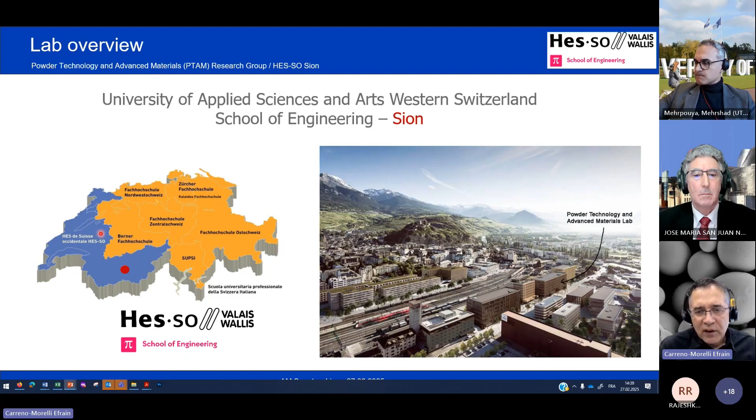I am quite focused for this organization on the sinter-based manufacturing techniques as binder jetting and others. My lab is located in Sion. Our strategy is related with providing solutions to industrial partners. This is why we are active in several materials, including the smart materials.

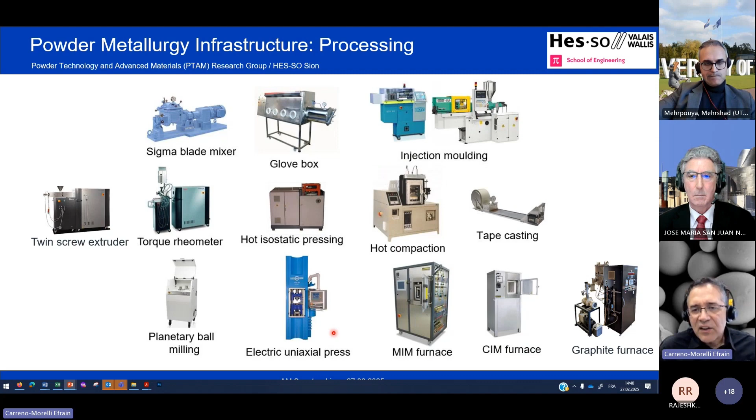We have state-of-the-art infrastructure for handling powders and mixing powders, to shape powders also by injection molding, by tape casting, hot isostatic pressing, and we can sinter these powders in molybdenum furnaces, graphite furnaces, ceramic furnaces, etc. We also do the classical uniaxial compaction to make parts by press and then sintering. And we have state-of-the-art equipment to characterize powders and materials.

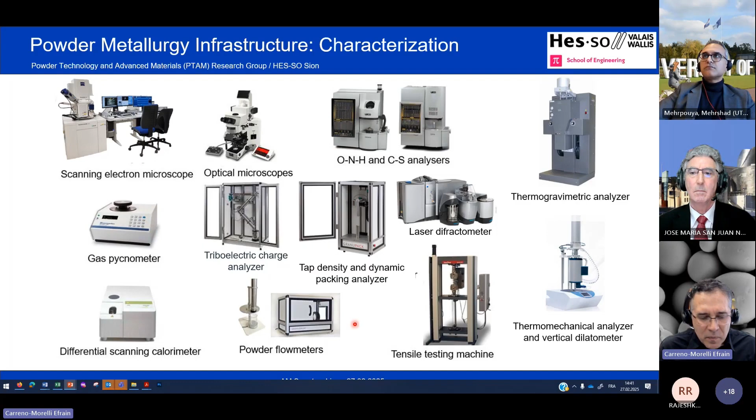Of course, microscopy, impurity analyzers, and we have all the necessary equipment to characterize powder particle size distribution and powder flow properties, especially useful for additive manufacturing techniques. We have dilatometers, calorimeters, all that.

In additive manufacturing, since 2017, we have the selective laser melting or laser powder bed fusion possibility. We have a desktop metal binder jetting 3D printer, which is a production machine with 1 liter of possible volume for build jobs. And we have our own technique.

We call it solvent jetting on granules, which we developed many years ago. I can provide a description of that. It can be useful to make shape memory and superelastic materials because it offers great flexibility on the base powders.

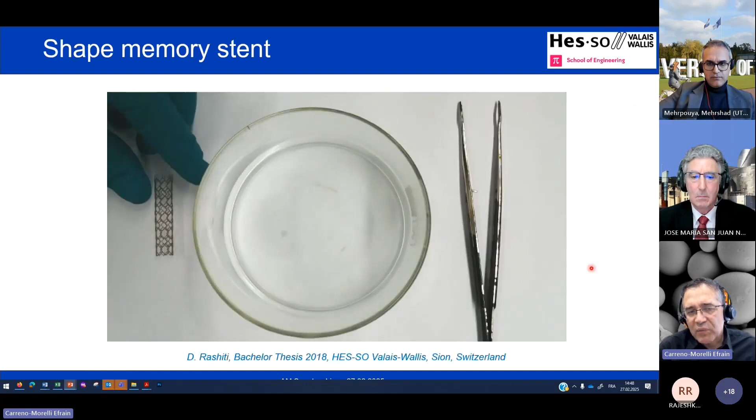Here are more details on the recovery of shapes of these stents.

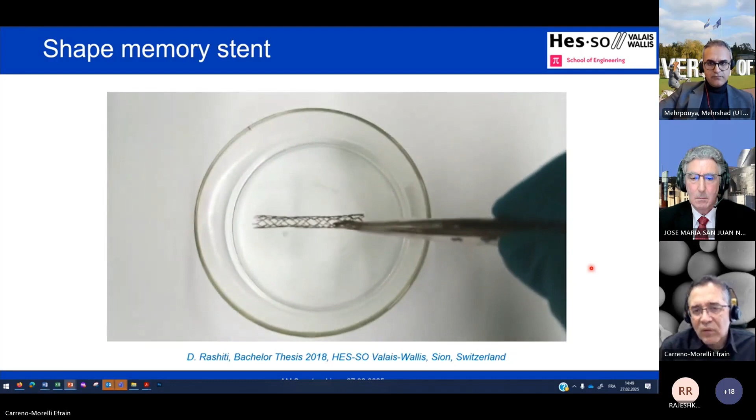More recently we had the chance to participate in a project of the European Space Agency with my colleagues Gabriel Pachotti and Samuel Remerme. We built simple shaped specimens, plates, and also some plates with a mesh, and we sent them to the labs for validation.

All the specimens need to be carefully controlled before being put in the sample holder before being allowed to fly. This project is called Euromaterial Aging, and the goal is to test the materials under the harsh conditions in space.

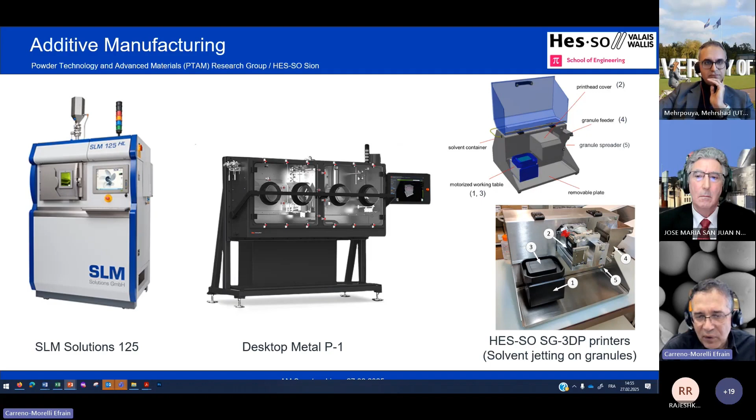When we use solvent on granules 3D printing, we perform it under air, without any inert system in the printer. We take care in powder handling and also in strict debinding and sintering conditions, but the printing itself was under air. This is probably not the best, but with our prototype we cannot do more than that. With devices like the Desktop Metal P1, one can work under a protective atmosphere, but we have not worked with that until now. And with laser powder bed fusion, we have just used argon of commercial purity. For the moment, these are our conditions.

There are two more questions. Someone asks, especially for the NiTi alloy, how is your curing and debinding stage handled because of contamination, and what is your binder, or what is your binder percentage exactly?

For the moment we do not disclose too much about the composition of our granules. Hope it will come soon. But let's say that the debinding and sintering conditions are similar to powder injection molding.

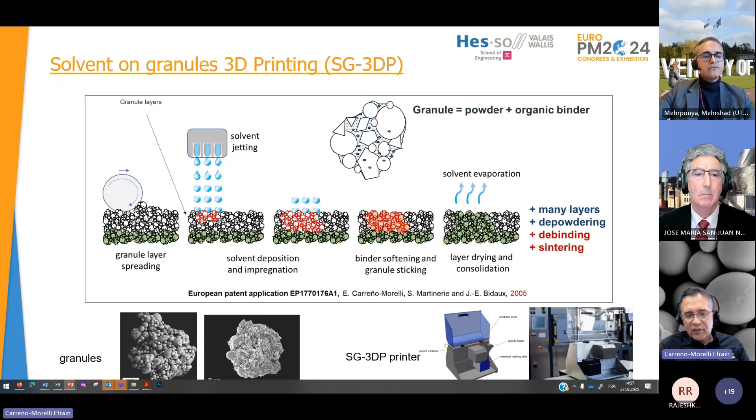If I understand properly, for the moment, in our knowledge and capabilities, we are far from the standards requested for medical applications. The standards are quite strict - many properties, including surface roughness, including fatigue, which is related to surface roughness. The potential advantage, of course, is freedom in shape and geometry, and also saving material. But the challenges are big in mechanical properties, fatigue properties, and surface condition. We can list some potential advantages, but this is just the very beginning of a nice adventure, we believe.

Maybe the last question, from Islam: thank you for the presentation. Utilizing both binder jetting and LPBF for production of NiTi, what would you say is the main challenge for binder jetting?

For binder jetting, it's very nice for mass production - much more convenient than laser powder bed fusion techniques, in our opinion. The challenge comes mainly from contamination, because of the binder or the printing conditions, and then the debinding and sintering conditions. These are the main challenges. But it's a technique which offers reduced roughness compared with laser-based techniques.

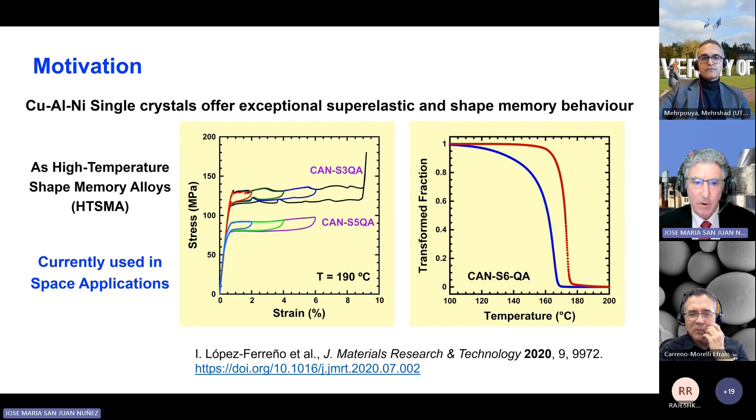So what is the motivation for doing additive manufacturing on copper-aluminum-nickel alloys? We have been working for several years on copper-aluminum-nickel single crystals because they offer exceptional superelastic and shape-memory behavior as high-temperature shape-memory alloys. For instance, I show here a couple of superelastic tests on two different alloys at 190 degrees centigrade, in copper-aluminum-nickel single crystals. This single crystal can be managed in order to have the transformation temperatures above, for instance, 160 degrees centigrade - meaning they work at high temperature, and we can control the transformation temperature between 100 and 200 degrees centigrade basically. At present, these single crystals are currently used in space applications, and in fact they are already flying in space.

At the beginning, we developed that in a European project. The single crystal produced in our laboratory are acting as a trigger in the space actuator for releasing the solar panels, or releasing the satellites, and so on. This is a technology that is tested, and at present we are doing the technological transfer to companies of space applications that produce space actuators.

But the point is that for many applications, single crystals are not very convenient because single crystal has a limited shape for applications. And then we was thinking on polycrystals. But what's the problem in copper, aluminum, nickel? Polycrystal tend to be brittle.

And this is a general property in all copper-aluminum based alloys, like copper-aluminum-manganese, copper-aluminum-beryllium, and so on, because it's coming from the high elastic anisotropy of these alloys. So because of this elastic anisotropy, for instance, the elastic modulus in the 1-1-1 direction is 10 times higher than the elastic modulus in 0-0-1.

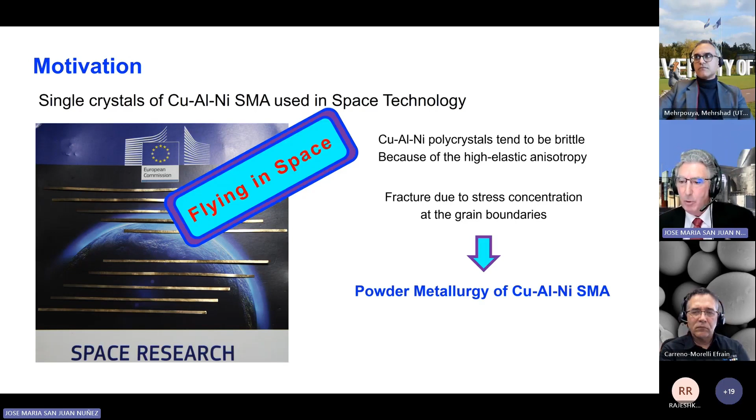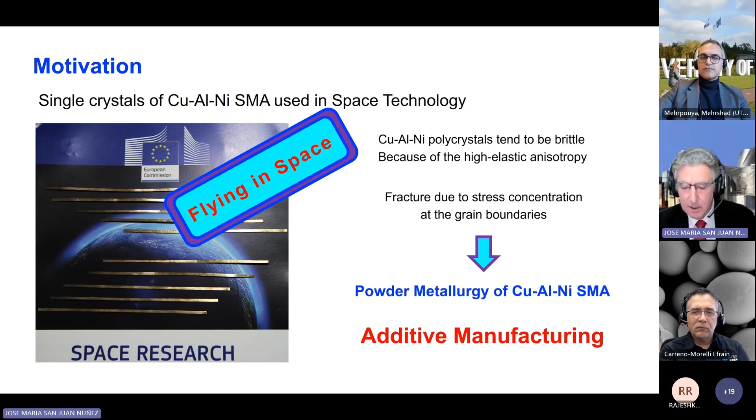So this is the idea why we use powder metallurgy of copper-aluminum-nickel shape memory alloys. And in particular now, with the development of additive manufacturing techniques, obviously we move to the production of these polycrystalline alloys by additive manufacturing. So this is the motivation.

Then, for the production by additive manufacturing, we work on different aspects. As it's a powder metallurgy technique, all the process begins by the atomization of the material. And then we explore 3 different lines.

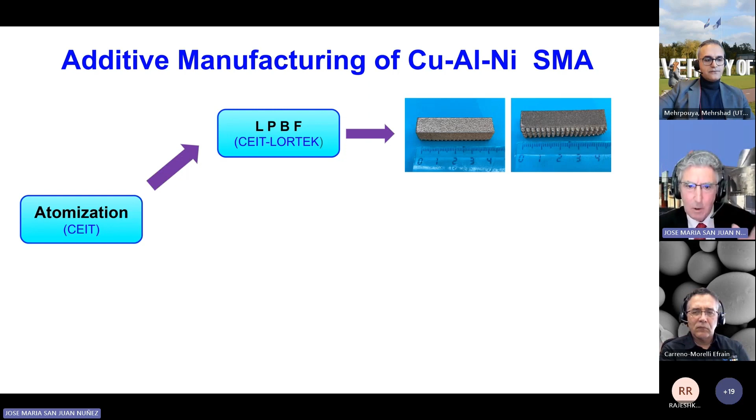The first line is to produce the massive material by laser powder bed fusion, in collaboration with our partners in the project. We also work on laser metal deposition with other partners, and also we produce the material by the classical metallurgy route, by hot isostatic pressing and hot rolling, in order to have a reference material, because this strongly textured rolled material is perhaps, up to now, the more performant material in this kind of polycrystalline alloys.

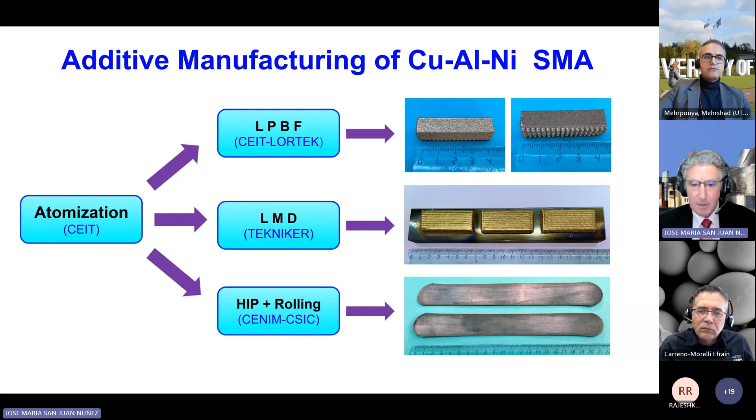So in the present talk, I will focus my attention on the first line, the production of this material by laser powder bed fusion, but I will take as reference for the performance the classical route, the HIP and rolling material, because this HIP and rolling material exhibits really very good properties.

And in order to compare it with the additive manufacturing produced components, we use exactly the same size of powder, between 15 and 45 micrometers, to produce this material, so that the starting point of the powders will be the same.

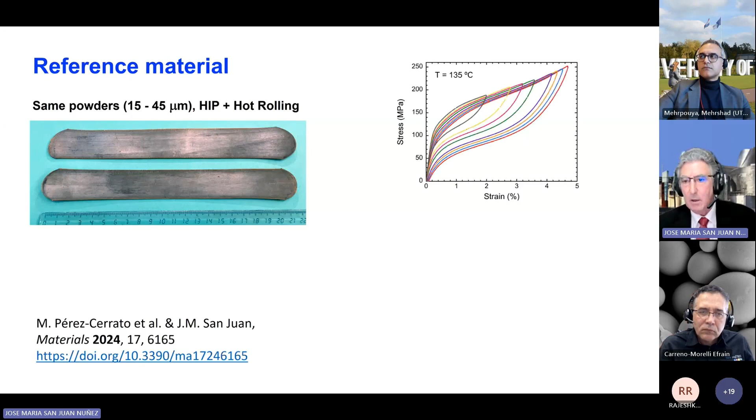So in this HIP and hot rolled material by the classical route, we obtain really very good performances: superelastic behavior with a complete recovery, and a reproducible shape memory effect that recovers perfectly up to 5%. So this will be our reference material to compare the progress on additive manufacturing when we obtain the material.

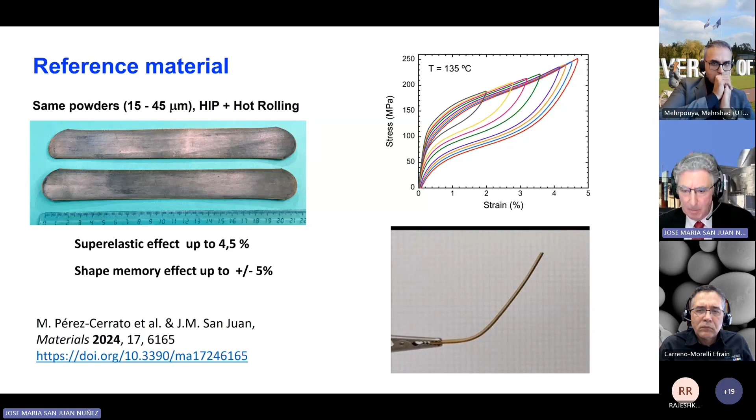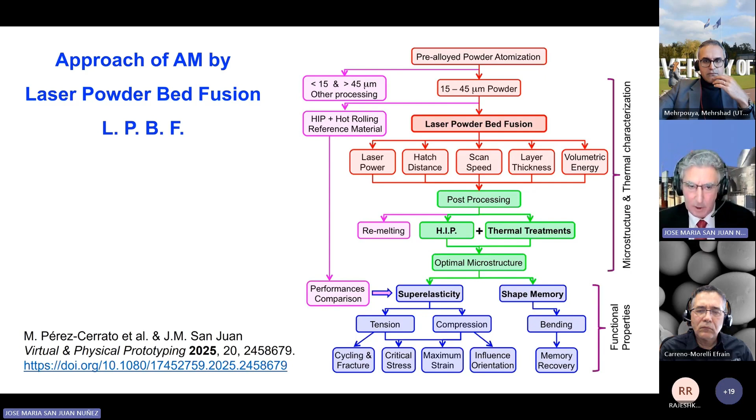And then after that, we use a couple of different steps for post-processing. Finally, when we get the optimal microstructure, we test the superelasticity and the shape memory in different conditions: tension, compression, bending. And eventually we compare with the performance I showed you in the classical powder metallurgy route, in order to verify the progress on the performances in additive manufacturing shape memory alloys.

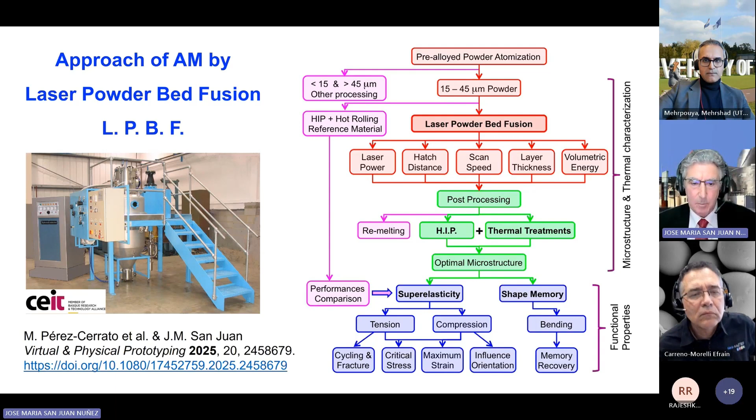So as I commented, it all starts with the powder atomization, done by our partners at CEIT, who have a small atomizer that produces 3 kilograms per atomization. And then these are the kind of powders we get. So this is the complete distribution, and after sieving from 15 to 45, this is the distribution we have locally.

You can see here a powder, as our transformation temperature is above room temperature, you can see the martensite in the powder particle. And as I commented, the atomizer produced 3 kilograms in each atomization. So in order to have enough material for the additive manufacturing process, we did 3 different atomizations, and our colleagues from CEIT master the atomizer very well, so all 3 atomizations really match perfectly the concentration that was established as target.

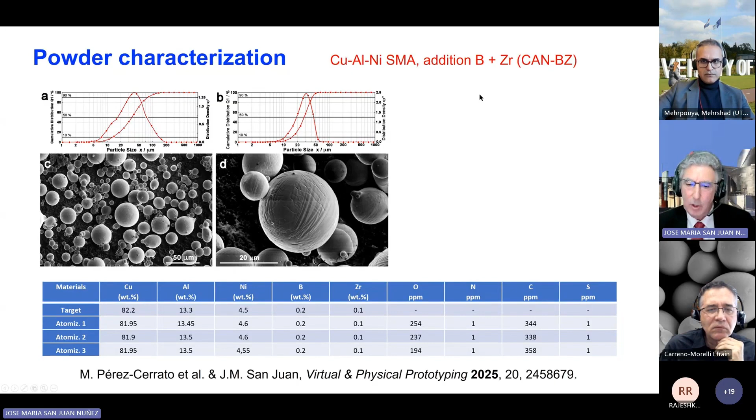And obviously we get some ppm of oxygen and some ppm of carbon, but in general, the reproducibility of the chemistry of each atomization is really very good. I have to comment here that in addition to copper, aluminum, nickel, as you can see in the components, we add some boron and zirconium as grain refiners, to avoid further important recrystallization in the material.

The reproducibility of the atomization can also be seen if we perform differential scanning calorimetry on the powders obtained in each atomization. You can see here the comparison between the thermograms of powders from atomization 1 and atomization 2, and the thermograms are absolutely superimposed, so the reproducibility from one atomization to the other is quite perfect.

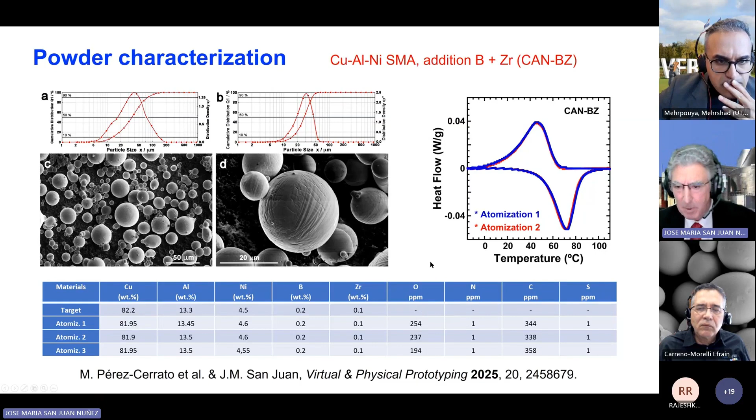These are the powders we will use to produce parts by additive manufacturing via laser powder bed fusion, using a Renishaw 400 machine with a reduced volume setup, since we don't have too much powder available. We have done a design of experiments changing several parameters like laser power, hatch distance, scan rate, and layer thickness. You can see here the different aspects.

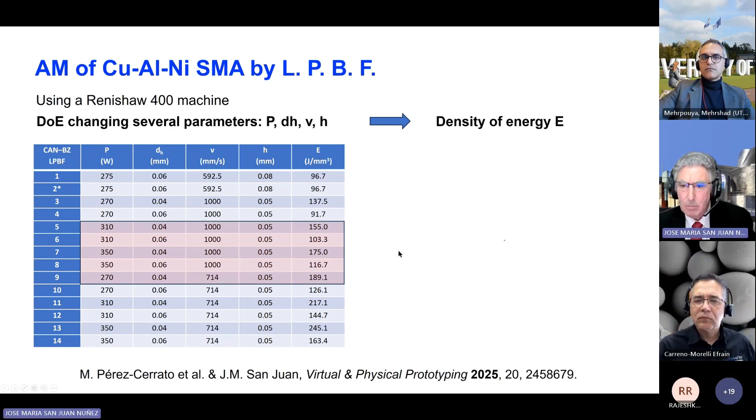Let me focus on the central part of this design of experiments. This is the aspect we get by optical microscope. When we have low power, in this case and this one, we get pores that are very, very big, and this is improved in case 8, in which we have practically no pores.

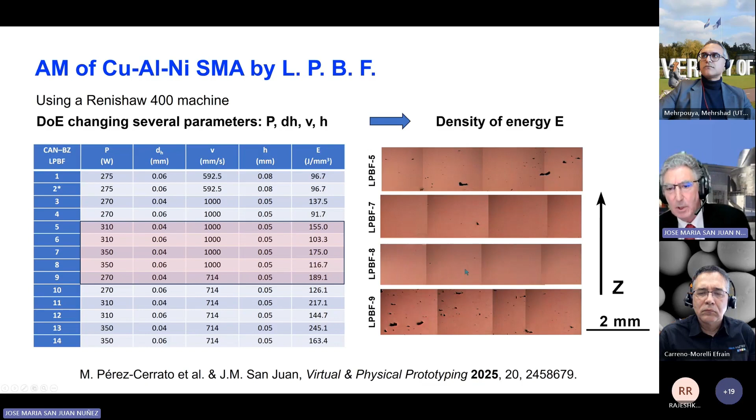This is because for low powers, here and here, there is a lack of fusion. You get powder particles not melted inside the cavities of the big pores found in the material. The point is that even when the energy density is high, with the same power but different parameters, we can get a much higher energy density than in this other case, and in both cases we obtain this same problem.

This is an important point because it means there is a critical threshold on laser power. If you don't have enough power, you cannot guarantee the local melting of the alloy because of the high thermal conductivity of the copper-based alloy.

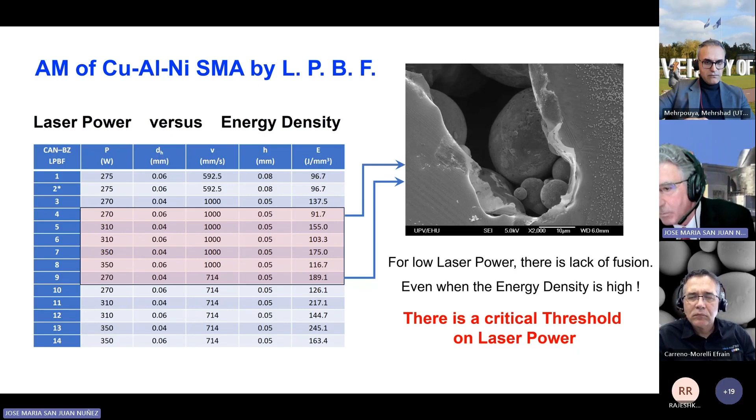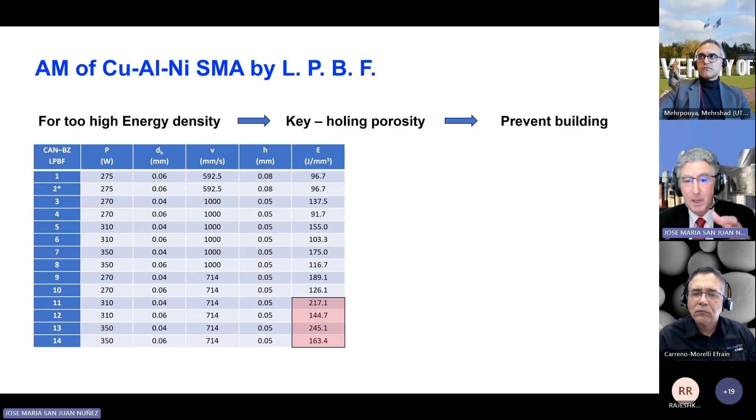On the contrary, for too high energy densities, like in the lower part, you can have keyhole porosity that could even prevent the building of the material, and it really becomes destroyed during growth. This means there is a narrow window, an equilibrium between the laser power threshold and too much energy density, and you need to find the middle ground.

In our case, 350 watts with this scan speed and these parameters gives an energy density of about 120, and this was the best compromise to grow a clean material.

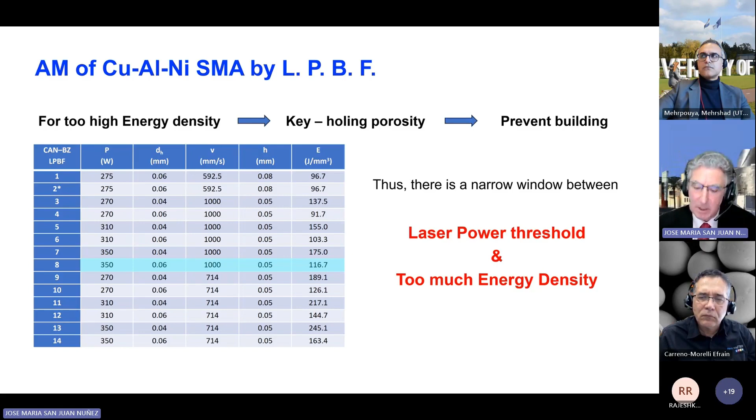However, in all cases we obtain precipitates that appear during laser powder bed fusion. This problem was already indicated and published in a previous work, and it is very important because it will destroy the functional properties of the shape memory alloy.

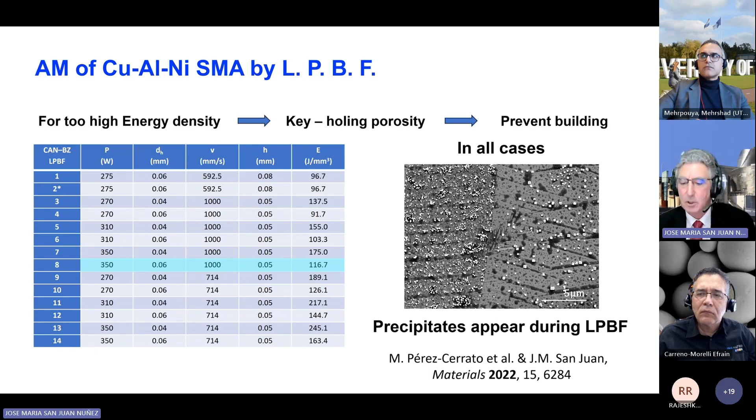There was some controversy on this point, as some authors claim it would be possible to get the functional properties of shape memory alloys directly through laser powder bed fusion. But at least in copper-aluminum-nickel shape memory alloy, it was demonstrated that this is not possible, because of the precipitation of the equilibrium phase during the laser powder bed fusion building process.

If this austenite phase is cooled slowly, it will decompose into the equilibrium phases. But what is more important for us is that this frozen beta phase, if overheated, will also decompose into the equilibrium phases, because it's not an equilibrium phase at room temperature or around 100 degrees centigrade, which is the temperature range we use for shape memory alloys.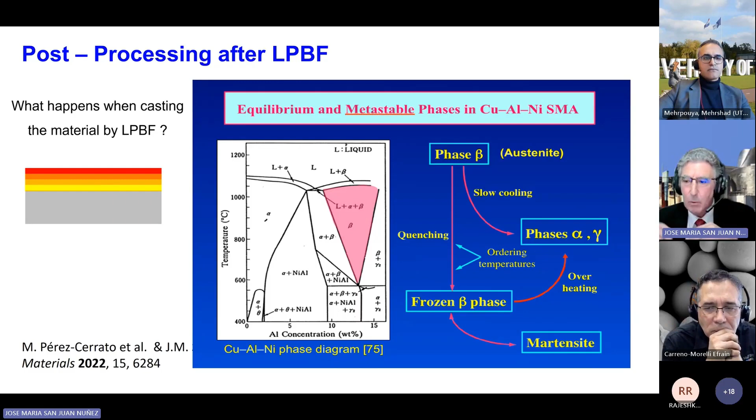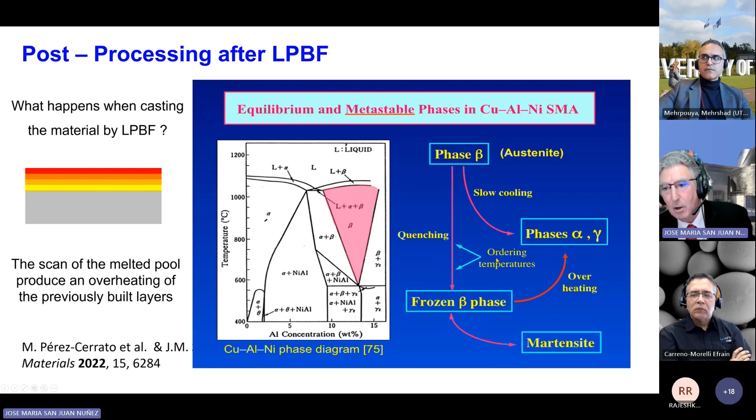Another overheating takes place below on the different layers, and this happens again and again as we progress in building the material. Systematically, the scan of the melted pool over the surface produces an overheating of the previously built layers. This is the reason why we overheat the frozen phase and then produce a precipitation of the equilibrium phases.

This is seen in our scanning electron microscope image, where we have done microanalysis, EDX, and line scan at the SEM, and these are the kind of precipitation you can find just after building the laser powder bed fusion sample.

In this case, these precipitates are copper-rich and poor in aluminum, corresponding to the equilibrium alpha phase, this one or also this one. On the contrary, this other equilibrium phase, which I can put in green, corresponds to a phase rich in aluminum and poor in copper. So this is the equilibrium gamma phase.

So not only the line scan, but we have also measured the concentration point by point of the different phases and the matrix, and we can really identify that the precipitation observed corresponds to the precipitation of the equilibrium phases during laser powder bed fusion.

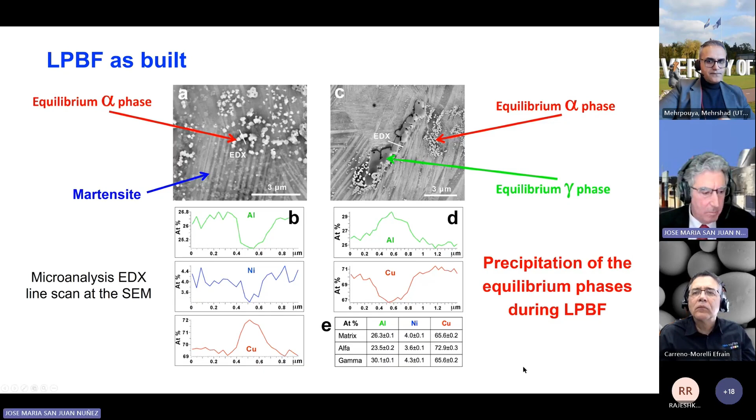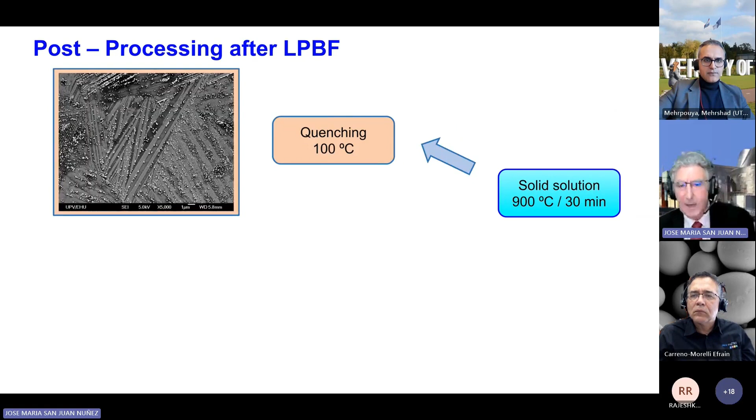As I commented, this is important because it will destroy the behavior of the material, so we have to do a solid solution. Even if we do a slow quench at 100 degrees centigrade, we can still get precipitates. But if we quench at 0 degrees centigrade, and then do an aging to control the atomic order, we can get a fully transformed material in martensite, absolutely precipitate free.

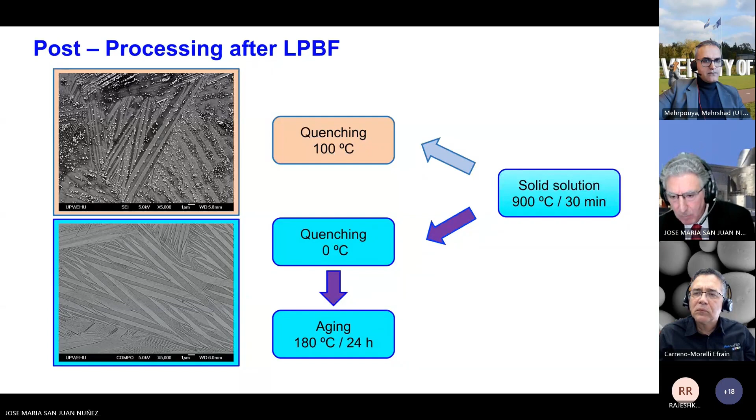So we can say that the controversy is solved. Thermal treatments are required after laser powder bed fusion. This is also seen in the thermograms.

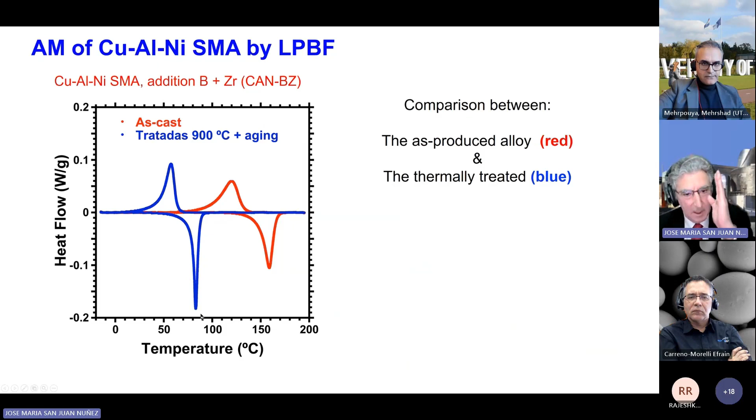Here you can see the differential scanning calorimetry thermograms of the as-cast material, which showed all the temperatures fully shifted to high temperature because of the precipitation. After the thermal treatments, the material exhibits a very sharp transformation at the expected temperatures because of the concentration. So definitely thermal treatments are required, and this is no question.

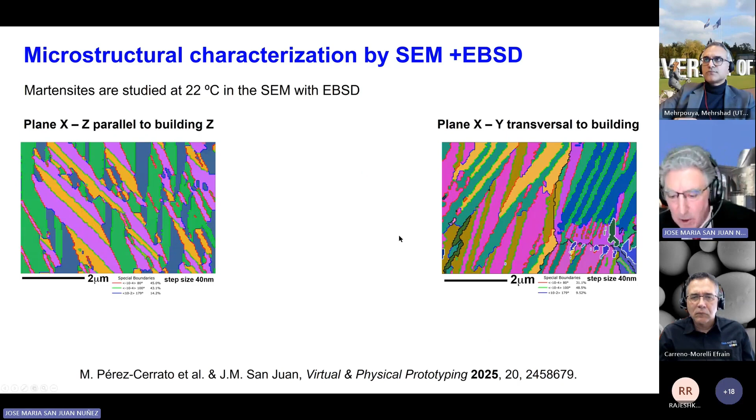These martensite variants are determined by electron backscatter diffraction and are identified, in both cases, as self-accommodated groups of monoclinic beta prime 3 martensite with different orientations and with the relationship corresponding to the theoretical background.

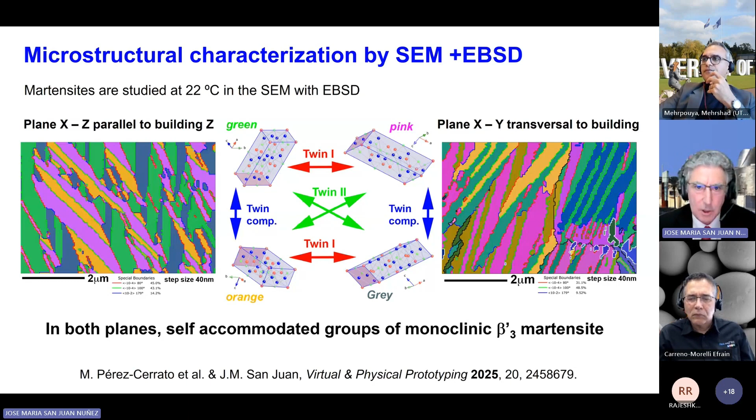So we get a good martensite, and then we move to the characterization of the austenite. To characterize the austenite, we have to heat up above the transformation temperature. So the austenite is studied at 100 degrees centigrade using the heating stage at the SEM with the EBSD.

What we first observe is this is the Z direction of the building process. So we have a columnar structure that is developed in the building direction, exhibiting a really strong texture in the 001 direction of the austenite.

This texture can be seen also in a top view from the upper part of the material after growing. This is a key aspect because the columnar grains are moving up to the surface. We can also confirm the texture of the columnar grains towards the upper part of the building direction. In the middle of these columnar grains, there are plenty of subgrain low angle misorientation boundaries.

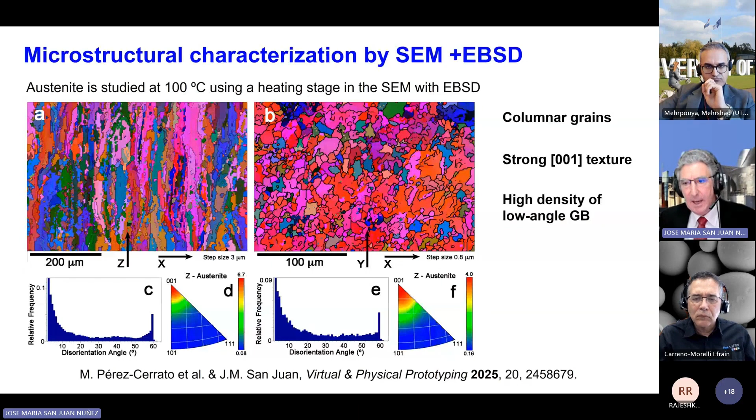So we can conclude that during laser powder bed fusion in these alloys, we obtain columnar grains with a strong 001 texture and a high density of low angle grain boundaries because of the rotation of these columnar grains with respect to the others.

An interesting point is that this microstructure from laser powder fusion is not destroyed by hot isostatic pressing. In fact, these images are taken just after the HIP on the laser powder fusion sample. So this means that the columnar microstructure and the texture is maintained after the hot isostatic pressing.

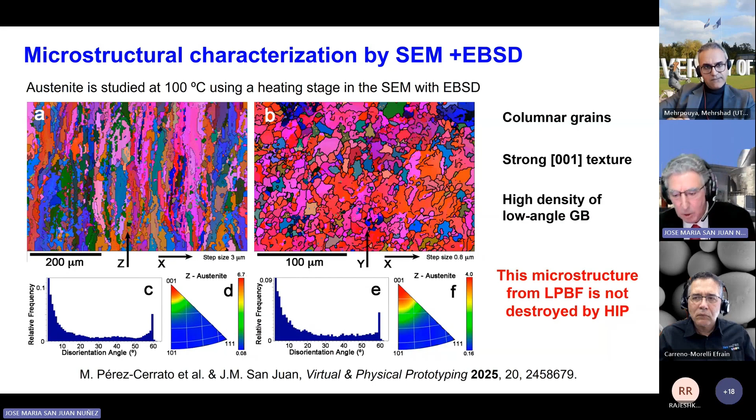But remember, we have also used the material for compression. If we do compression of the sample cut in the Z direction, we get a good superelastic behavior for lower stresses and for highest strain. When compared with the previous results on the transversal direction, we can see clearly the difference. Pay attention that the levels of the stress and the strain are not the same for the three curves.

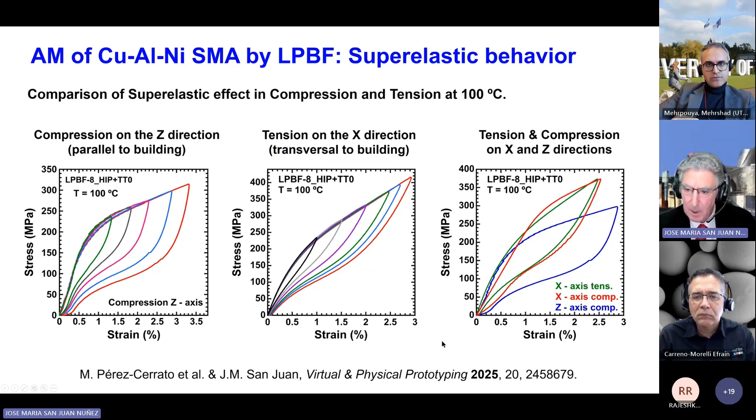This effect is also seen in martensite, because if we test this material at room temperature at 22 degrees centigrade, then the material is in martensite. So when we apply the compression in the parallel direction and in the transversal direction, we can get a much higher strain on this axis. And as we are in martensite, there is some important residual strain that is recovered by heating because of the shape memory effect.

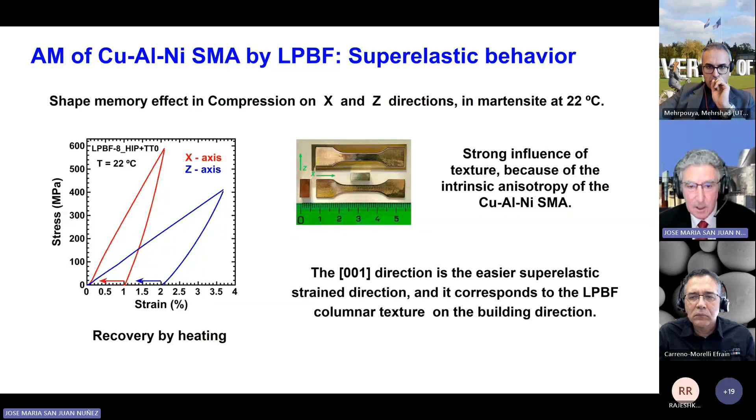So this test corresponds to the transversal, this sample cut in the transversal direction, and this blue corresponds to the cut parallel to the building direction. This means that there is a strong influence of texture because of the intrinsic anisotropy of the copper-aluminum-nickel shape memory alloys, and this is because the 001 direction is the easier superelastic strain direction. We have the chance that it corresponds to the laser powder bed fusion columnar texture on the building direction, so this texture will enhance the behavior of the material.

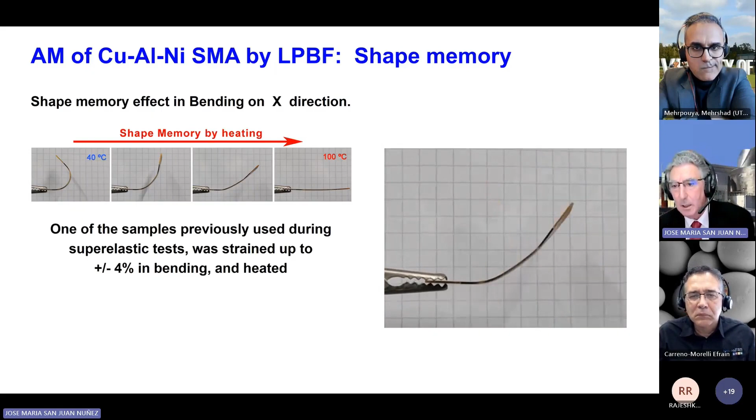So, if we move to the behavior of shape memory, we have used one of the samples previously used during the superelastic test. You can see it's the same shape, with the head for the tensile axis. But in order to visualize the shape memory, we strain it in bending plus minus 4%, and then heat it, and you can see the easy way in which the material recovers the shape by shape memory effect. This has been done many cycles, and the material exhibits an excellent shape memory recovery during multiple cycles.

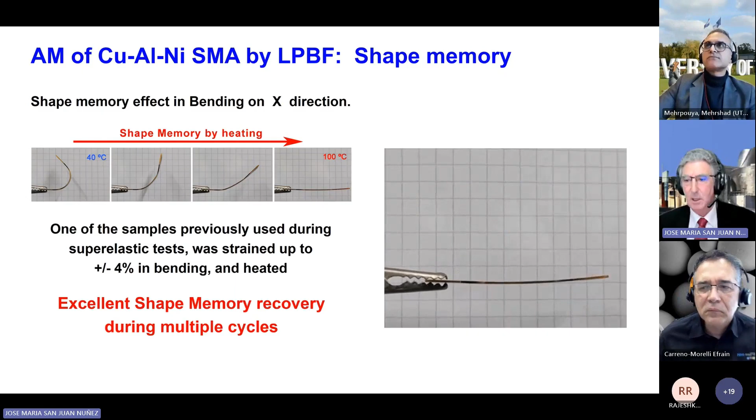So with that, let me move to the conclusions. The processing parameters for laser powder fusion of copper-aluminum-nickel shape memory alloys have been optimized. The point is that a threshold on laser power is required, and the density of energy must be limited to certain values in order to avoid keyholing.

The post-processing step, two post-processing steps are recommended. Hot isostatic pressing reveals as a good method to decrease porosity, like in another technology of aeronautics. And in the case of laser powder bed fusion, thermal treatments must be applied to redissolve the precipitates after laser powder fusion or after HIP, both of them. These thermal treatments are required to redissolve the precipitates and functionalize the shape memory alloys.

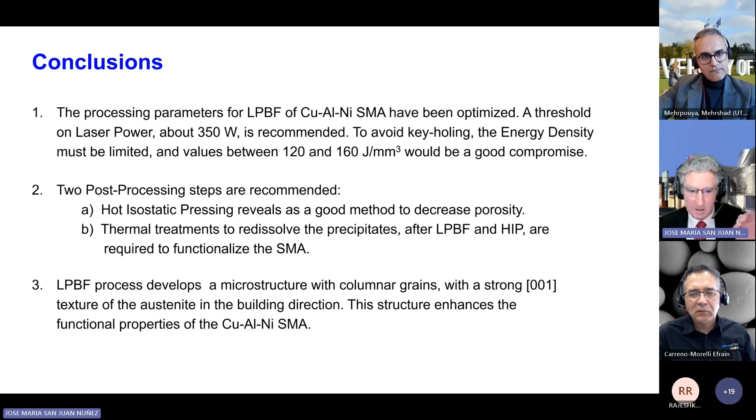The laser powder bed fusion develops a microstructure of columnar grains with a strong 001 texture that is good for the thermomechanical properties. This structure enhances the functional properties of copper-aluminum-nickel shape memory alloys.

Just remember that an outstanding superelastic behavior of about 2.7% recoverable strain has been obtained in both compression and tension in different axes, and good shape memory recovery up to 4% has been obtained on cycling in the material produced by AM.

If we compare with the classical route, we are approaching the performance of the reference material produced by powder metallurgy. We have not obtained yet the maximum result. Perhaps we are not yet ready for industrial production of these alloys through laser powder fusion, but we are close to it. So new progress will be coming soon.